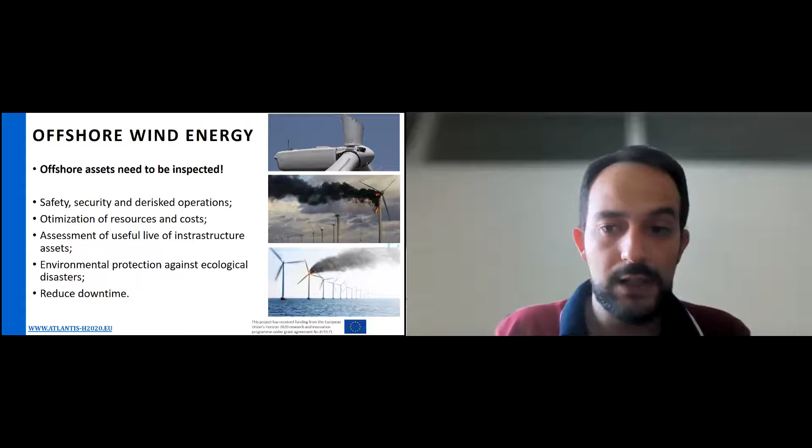So, hello, my name is Andry Maykol Pinto. I'm an assistant professor at the Faculty of Engineering of the University of Porto, and also a researcher from INESC. I'm here today to talk a little about Atlantis. In Atlantis, we are addressing the relevancy of inspection, maintenance, and repair activities for the offshore wind energy sector, since offshore wind farms require higher efforts related to turbine maintenance and logistics. And this is a rising problem since the offshore wind farms that are operating, particularly in Europe, are relatively young. Nearly 80% of the installed capacity will remain in the first half of their design lives by 2028.

So the project includes relevant stakeholders from the robotics sector, from the offshore wind energy market, as well as from the maritime industry. We have 10 partners, and Atlantis mainly addresses the scientific and technical challenges in this field, in particular a test facility and services for contributing to a seamless progression of robotic prototypes along the different TRL ranges, the development of new robotic platforms and autonomous driving features to improve the preservation of human life and safety, the enhancements related to operations and perception capabilities of maritime robots to make them more suitable to operate in critical conditions at offshore wind farms, which are needed to reduce the costs of maintenance and to avoid catastrophic failures, of course.

And finally, the acceleration of research and development of maritime robotics and the adoption of technology by end users. This project will establish a pioneer pilot infrastructure, which is particularly interesting for robotic developers whose goal is to demonstrate the added value of technology in offshore wind farms. Stakeholders from the offshore wind energy sector will directly benefit from these demonstrations, from these validations, and in particular because of the technology uptake.

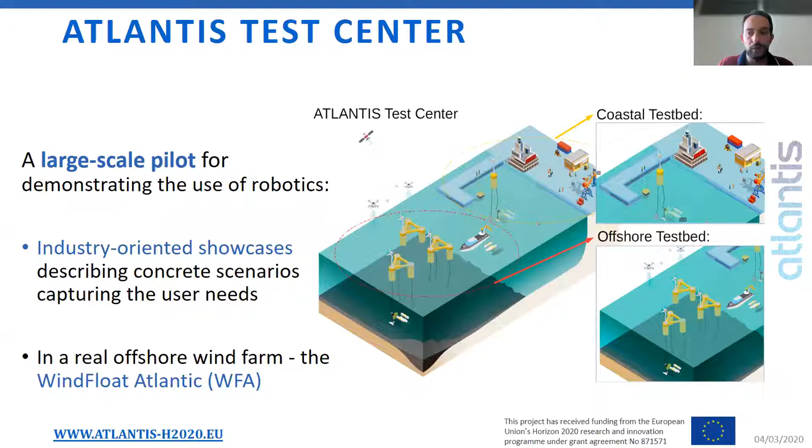Here in Atlantis we are developing a pilot infrastructure that is formed by two locations. One is the coastal test bed and the other is the offshore test bed. I will not show the video because of the time constraints. Nevertheless, the coastal test bed will be located in the Lima River here in Portugal. It will be linked to local stakeholders from the offshore sector, and the offshore test bed will be located in the WindFloat Atlantic Park, which is an offshore wind farm formed by 3 floating turbines in the Atlantic Ocean. This wind farm is owned by WindPlus, and it will be used to validate and demonstrate technology at high TRL levels. The Atlantis Test Center will constitute the first European test center capable of demonstrating robotic technology under extreme weather and sea state conditions, in particular because of the Atlantic Ocean.

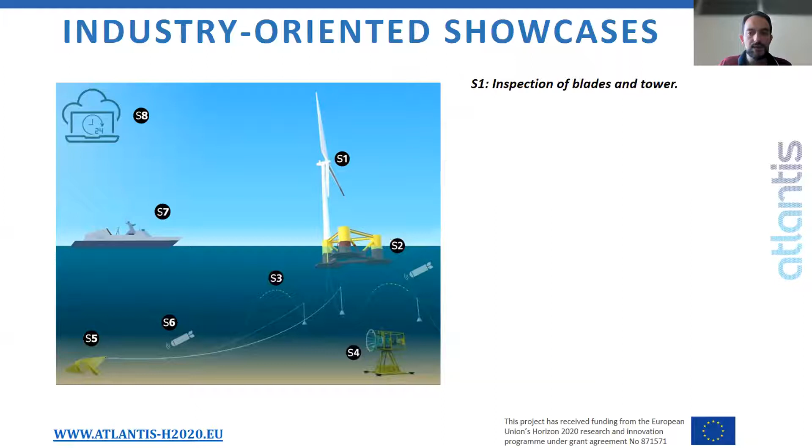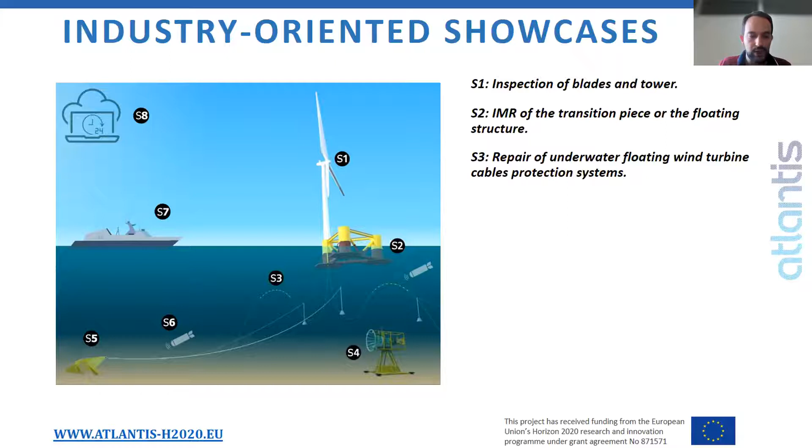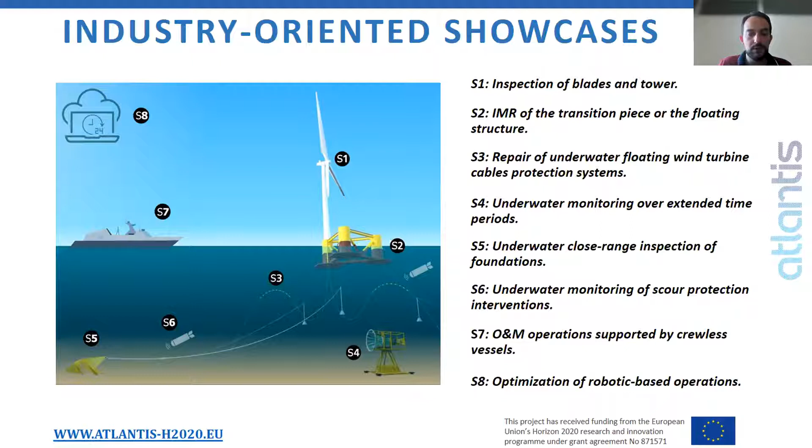It is characterized by showcases and scenarios for inspection, maintenance, and repair activities that are being led by the industry. For instance, inspection of blades and towers, inspection of transition pieces, repair of underwater floating protection systems, underwater monitoring over extended periods of time, underwater close range inspections, underwater monitoring of scour, operations supported by crewless vessels, and finally the optimization of robotic-based operations. Each scenario addresses specific technical aspects of inspection and maintenance, and it enables distinct robotic solutions and services to reach technological maturity. These robotic solutions can be of different nature. For instance, the Atlantis Test Center will have scenarios for the operation of AUVs, UAVs, ROVs, ASVs, and different inspection, maintenance, and repair technology. I will not enter into many details for each scenario because we are publishing videos describing the specificities of each scenario.

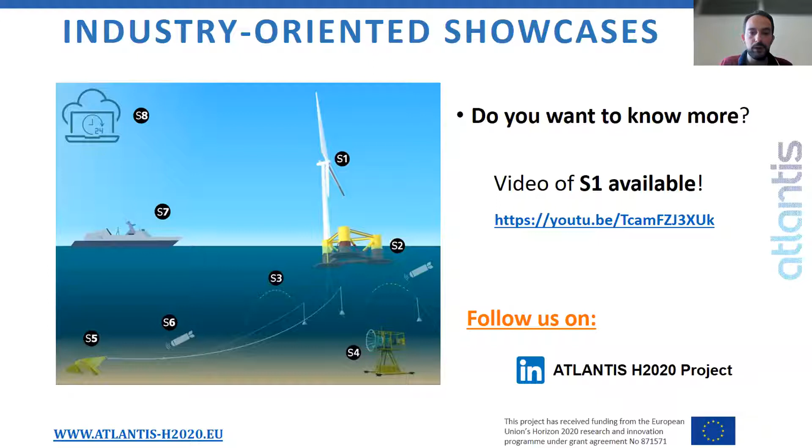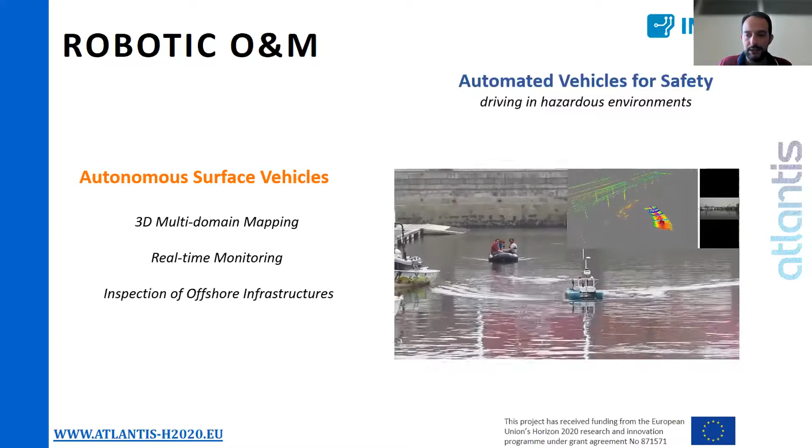More than providing a test facility, we also provide services to both academia and industry, and these services will support the activities at the Atlantis Test Center. This is particularly interesting for everyone that wants to perform open sea experiments in a safe and cost-efficient manner. But of course, the Atlantis project has amazing robots that will be demonstrated in different scenarios. We are increasing the TRL of robotic platforms to respond to industry-led challenges and problems. We are developing a new era for robotics-based O&M operations. I will just present a few examples of technology being enhanced in Atlantis. The first is the ASV technology for multi-domain mapping. A perception and navigation solution can be installed in different small to medium platforms, and it will be able to recognize elements in the environment, for instance, for monitoring the scour.

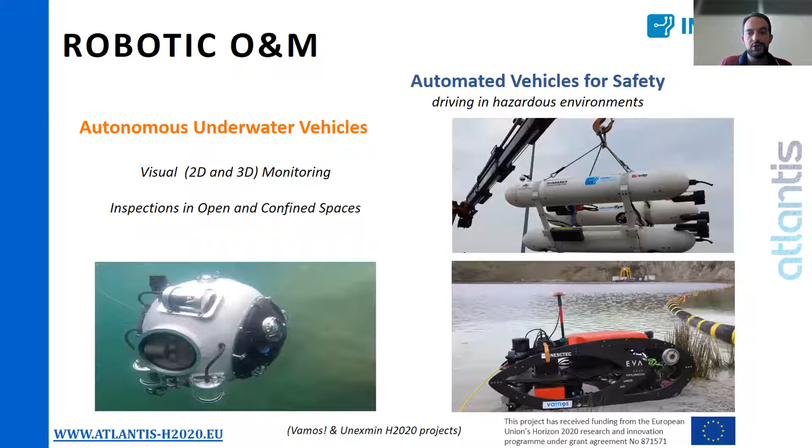We have a wide range of underwater vehicles. These vehicles can operate in different hazard scenarios for inspection, maintenance, and activities, from confined flooded mines, galleries, to flooded open pits, or even at dams. The performance of this technology will also be investigated in the Atlantis Test Center.

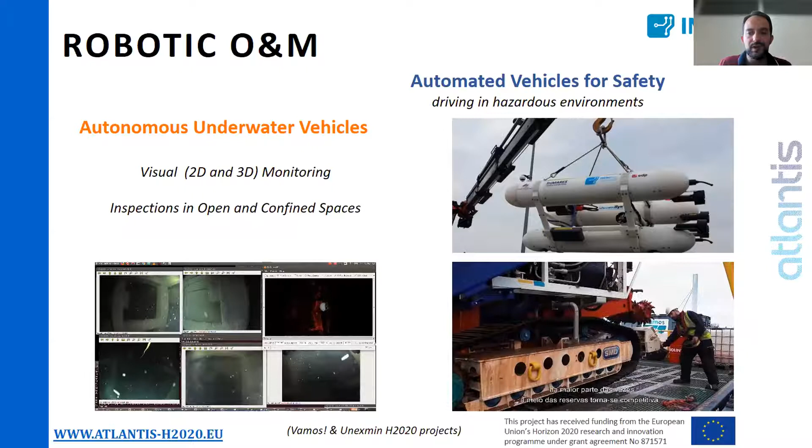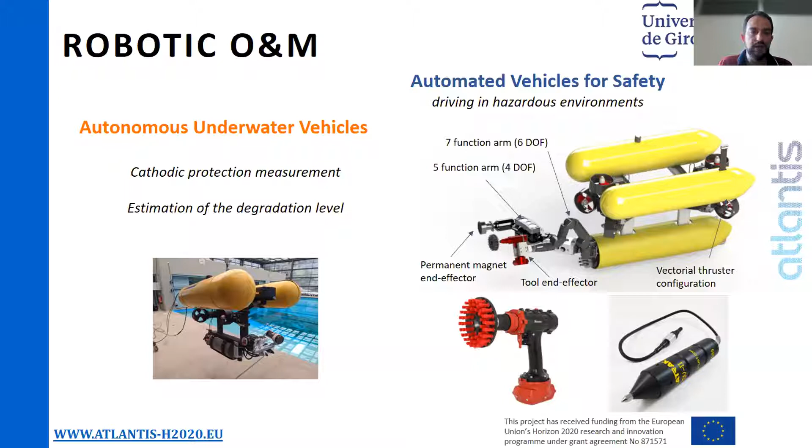We are using intervention AUVs for cathodic protection measurement for underwater structures. Autonomous measurement of cathodic protection potential over surfaces, beams, and other structural elements of the floating structure, including the necessary surface preparation, cleaning with the rotating brush, are being developed. The estimation of the degradation level of the protection anodes, automatic 3D laser scanning of protection anodes, and reconstruction of the anode volume for the estimation of the volume loss over time is also being developed.

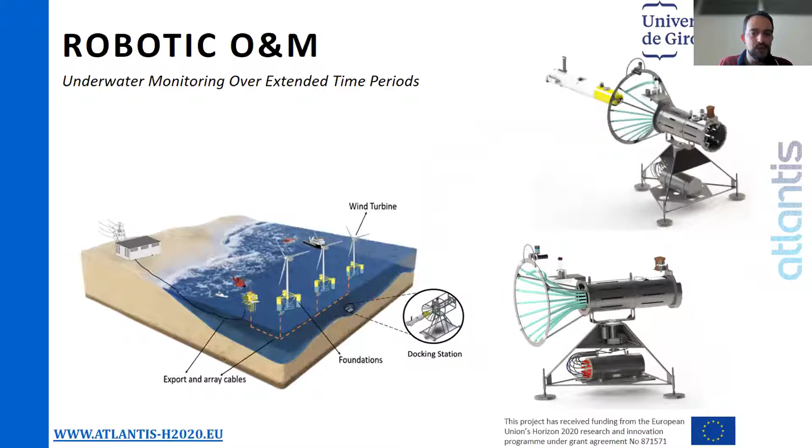We are also developing technology to enable long-term deployments of AUVs, for instance, a docking station with wireless charging and wireless communication. And regarding the AUVs, a set of advanced features foster the autonomy of these agents. Our goal, of course, is to reduce the need of human-based operations here.

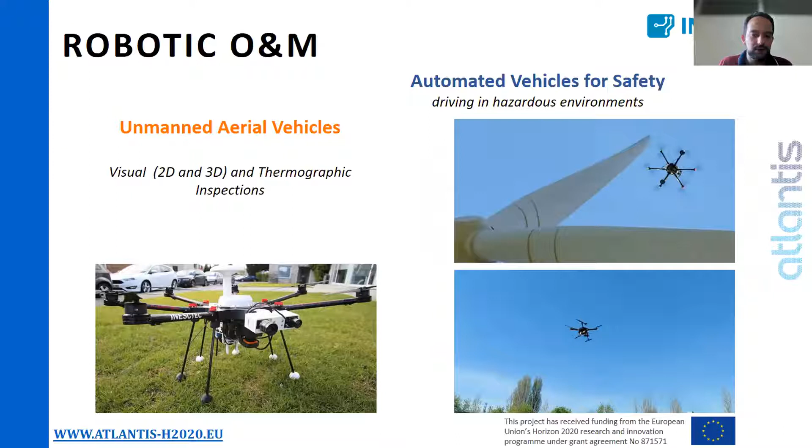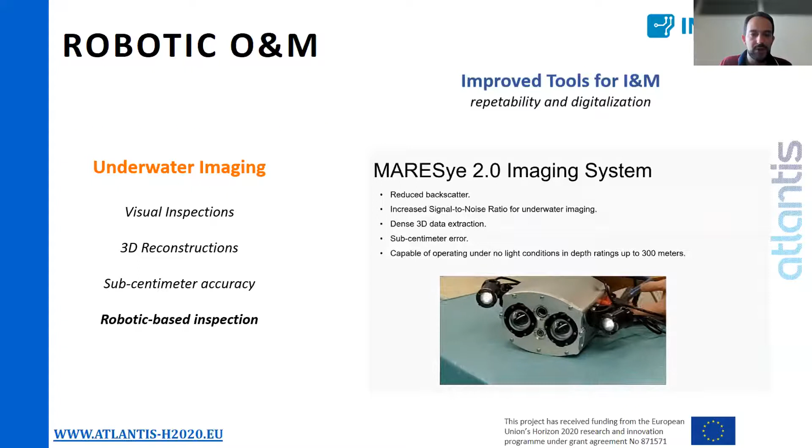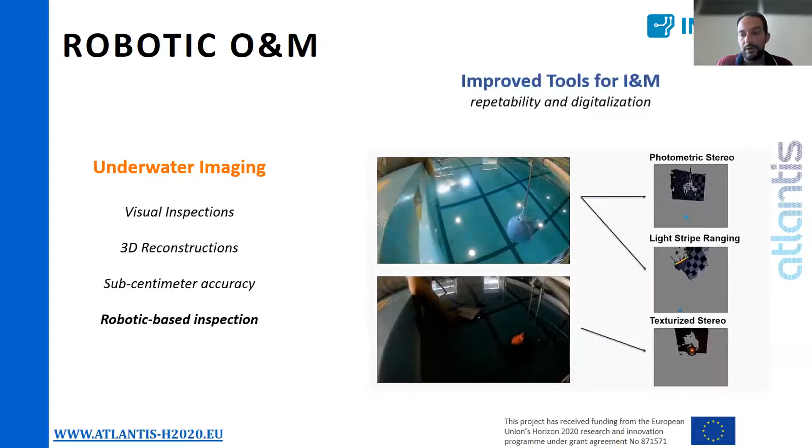We are also developing technology to support offshore operations, making the robots more capable of perceiving and interacting with the scenario. For instance, an underwater imaging system for close-range inspections is being developed under Atlantis. This system is able to provide 2D and point cloud information that is very accurate. The information is perceived in real time, and it is robust to photometric issues. We already discussed this in the previous presentation, related to subsea conditions. And this is crucial for tasks that involve intervention. We just saw that.

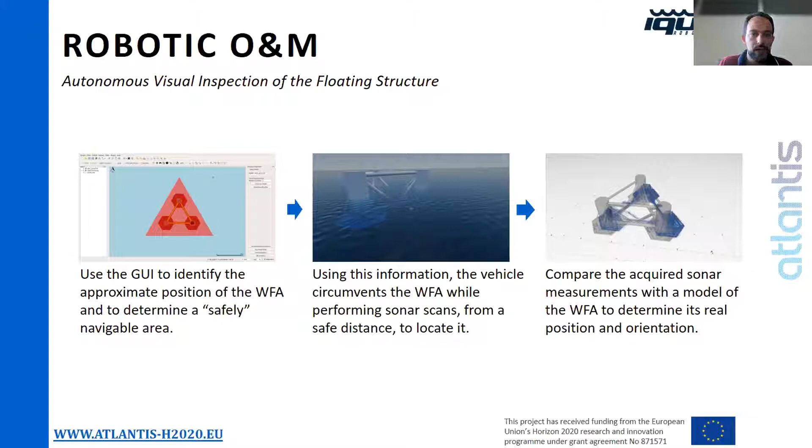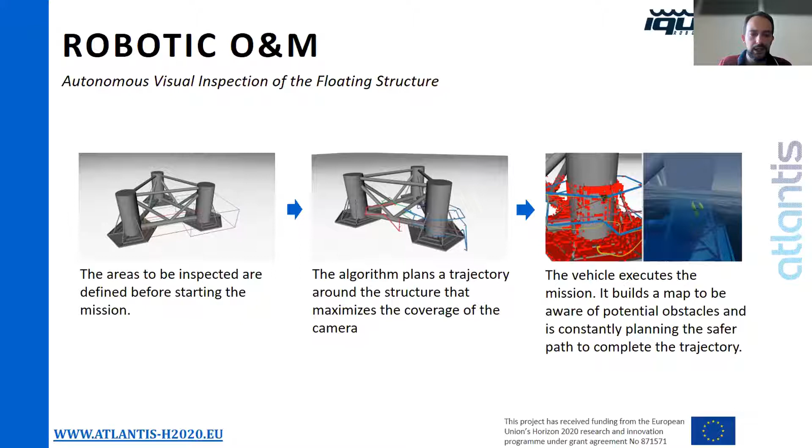Of course, we are developing other tools, for instance, for autonomous visual inspection of the floating structure. In particular, software for enabling close-range navigation. These navigation techniques intend to facilitate the visual inspection, mainly through autonomous underwater vehicles, which are simply not used by this industry.

Also, a tool for mission definition and supervision is under development. It will provide live and historical information. It will facilitate operations for planning and control, and of course, operation analysis. This is quite relevant. It will also include an interoperability function for managing different vehicles by a unified command and data sharing, and of course it will be already ready for ROS 2.

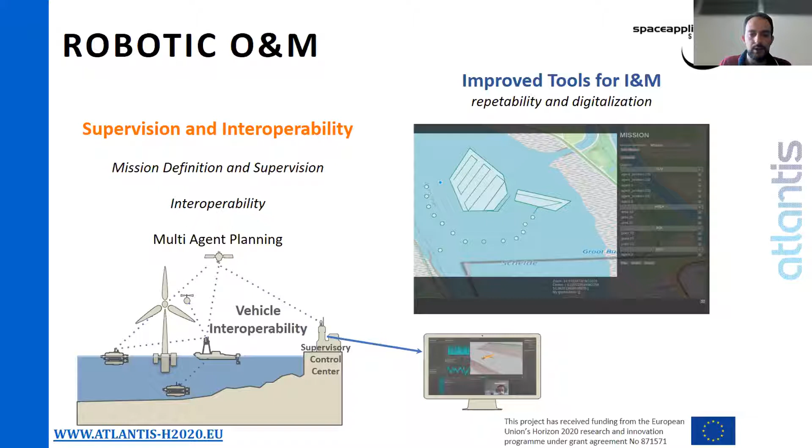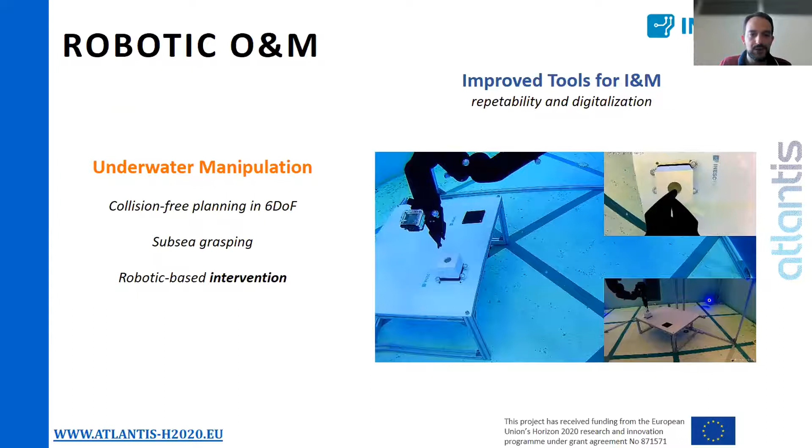New algorithms for safe and precise underwater manipulation are being investigated. Advances in this field will support the rise of new autonomous intervention techniques. So we have much more technologies.

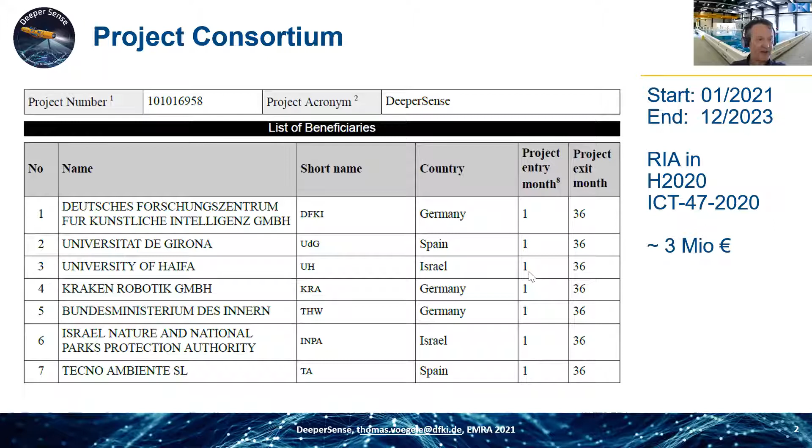And what we want to achieve in this project is that we really want to significantly improve the sensing capabilities of underwater, and not only underwater, robotics. And we want to do this in three use cases. The first use case is related to diver monitoring. So we want to enable systems that can look at divers and watch them doing their job and alert the oversight crew if there are any problems.

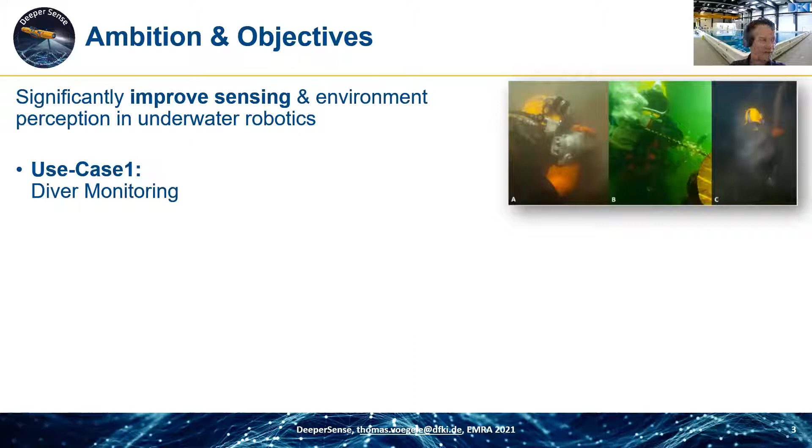The second one is on AUV navigation in coral reefs. So coral reef stands here for a complex and very delicate environment. So we want to enable AUVs to navigate much better in these coral reefs. And the third use case is on seabed mapping and seabed sediment classification.

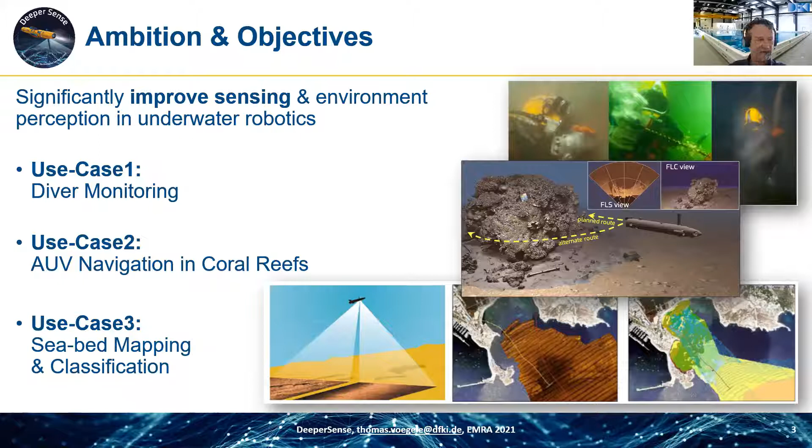The idea behind this whole thing, what we call intersensorical learning, was inspired by a relatively recent paper from Christensen et al. on bat vision. They showed that a combination of artificial ears, acoustic sensors, optical sensors, and neural networks can enable these acoustic sensors to create images that are like visual depth images. And this inspired us to come up with our concept for this DeeperSense project.

To explain this: in the training phase, we want to take a sensor, for example sensor B, which is a sonar system that creates some kind of fuzzy data, and combine this with, for example, a high definition camera through a neural network, and then train the acoustic sensor, train the sonar to create pictures that are almost the quality of the high definition camera.

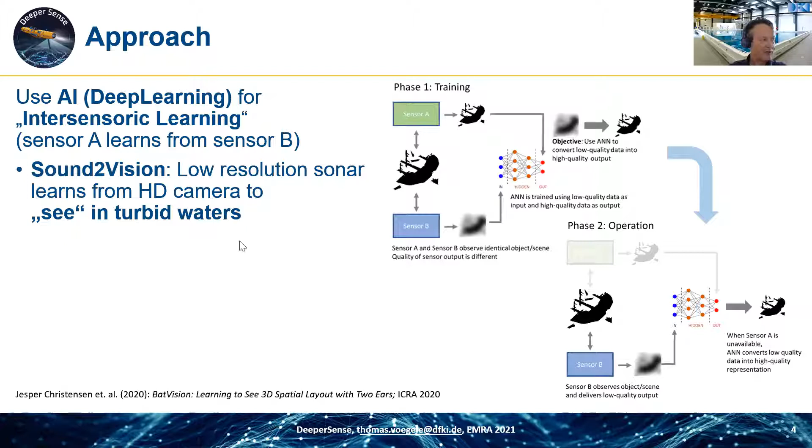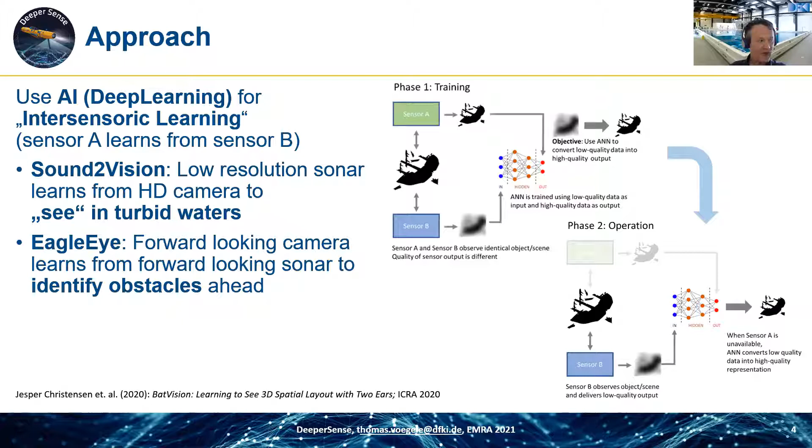And we want to do this in three different applications, really. Sound2Vision, which is related to diver monitoring, where we want to use sonar and high definition camera to see in turbid waters. Then what we dubbed EagleEye, which is related to moving in the coral reefs, where we want to use a forward-looking camera and a forward-looking sonar as a combination.

And the third one is what we call smart bottom scan, where we want to use a side scan sonar and camera images from the sea bottom to enable better sea bottom classification. As I said, this is the idea. We are at the moment at the stage of conceptualizing this and setting up the training data. Of course, for all deep learning algorithms, training data is the most important issue.

And so we are trying to get training data in three different locations, in our facilities in Germany, Israel, and Spain, but also in natural environments close to these facilities. And of course, we also try to create synthetic data, but we already found out it's not so easy to find simulations for these environments. So this is definitely a challenge, to create the data.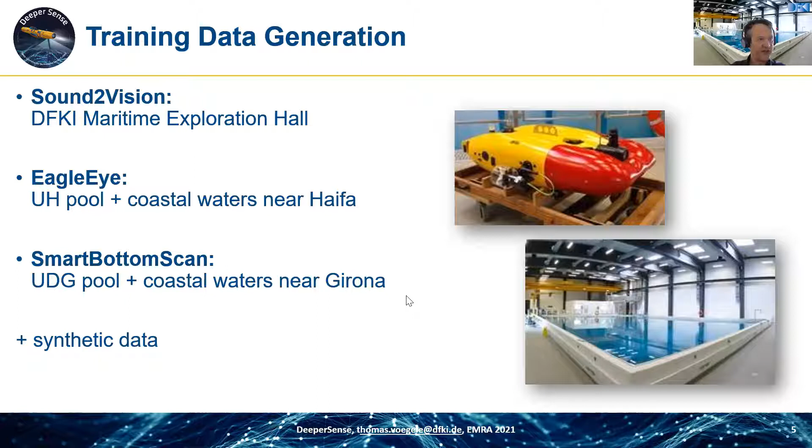That's why, when we have the data created, we want to share at least part of it with the community through a data repository. We are currently looking at options how to implement this, but some of these data at least will be shared with the community, and they will be used in our project for algorithm training in a three-step approach, three optimization and training cycles.

And then more importantly, once the artificial neural networks are trained, we want to validate them in field trials in 3 different natural environments. In Germany, we want to use the North Sea and also lakes around here in Bremen. In Israel, we're looking at the Mediterranean and the Red Sea, where we have a lot of coral reefs available. And in Spain, we're looking at the Mediterranean.

And the final demonstration will be in Germany, in Starnberger See, in 2.5 years' time, if everything goes well. The expected impact of this project, of course, is first to get these algorithms tested and field validated.

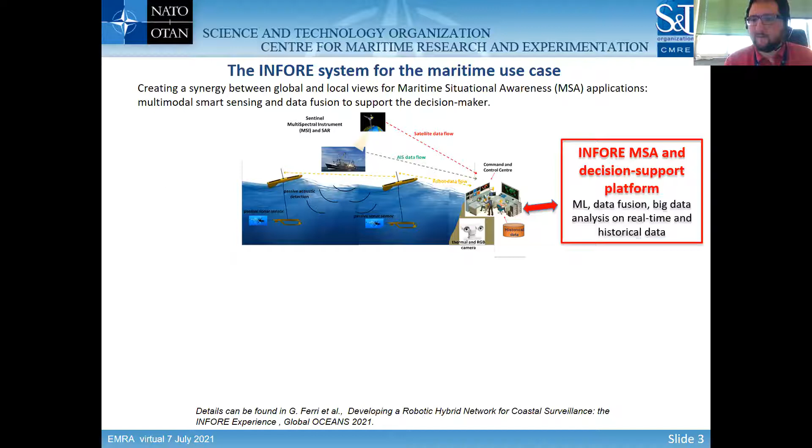And the idea is to use multimodal sensing and to fuse global view and local view based on a hybrid robotic network to integrate different sources of data to improve the MSA. So the global sensor, in which marine traffic from Greece is leading together with the Democritos Institute, will be a multispectral instrument from Sentinel satellite and a SAR sensor from the Sentinel satellite.

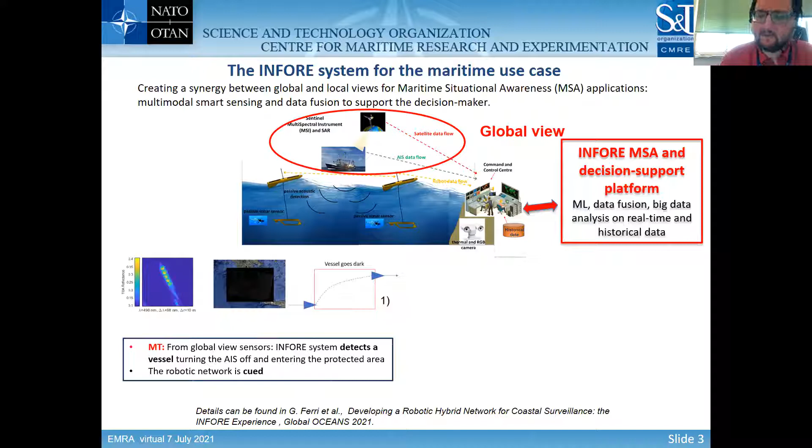While the local view, as I said, is composed of a hybrid and cooperative robotic network in which we have two wave gliders equipped with passive sonar sensors, a fixed thermal and RGB camera, and finally a fast vehicle for final target identification. So all this data is sent to the INFORE system, in which a fusion system based on machine learning and historical data, for instance on the track of vessels from historical AIS data, will be used for event detection that will trigger the actions of the network.

So our task inside the project is the development of this network of silent, long endurance, cooperative passive sensing robots based on wave gliders - surface vehicles. Why? Because they are early.

They can provide early stealthy vessel detection. They can offer persistent coverage of an area. They are silent, so we can use passive sonar processing. And they can share their data and cooperate with the onshore thermal camera. But these kinds of robots have limited speed and can provide bearing-only measurements because we are using passive sonar.

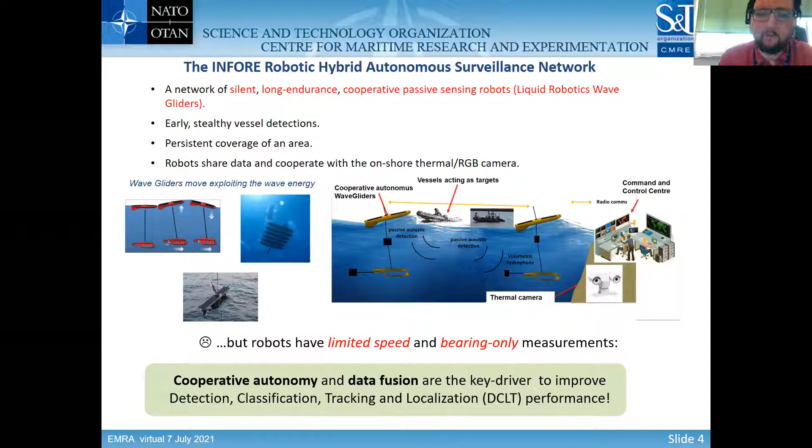So what we are developing is a cooperative autonomy and data fusion framework, because we think they are the key driver to improve the detection, classification, tracking, and localization performance. And how to do that?

So we are developing an occupancy grid mapping framework that will be the basis for cooperative behaviors. Based on experimental trials that we had with these Perseus volumetric arrays, we have developed a sensor model, and this sensor model is used to create this occupancy grid.

In each of these grids, the color represents the probability that a target is at a certain place. In this case, yellow, let's say, is good, and dark blue is bad. As you see, we have a beam of yellow because we have just bearing measurements.

Using these maps is useful because they can drive our area survey, giving us information about places that are likely empty (dark blue), likely full, let's say containing a vessel (yellow), and areas yet to be explored (light blue).

But it's not enough because we want to localize the target. So the vehicles share data, and here you can see the shared map, where we use the Laplacian operator and search for negative values of it. This means the two maps have some peaks of probability, which represent the geometric configuration we want to search for.

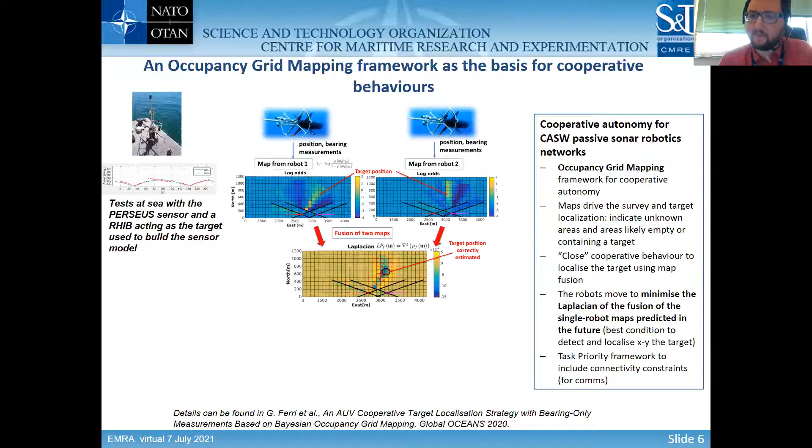How do we do that? We propagate into the future the possible maps according to different decisions of the robot, and the robots cooperatively decide their movement to create this good, from our perspective, geometric position.

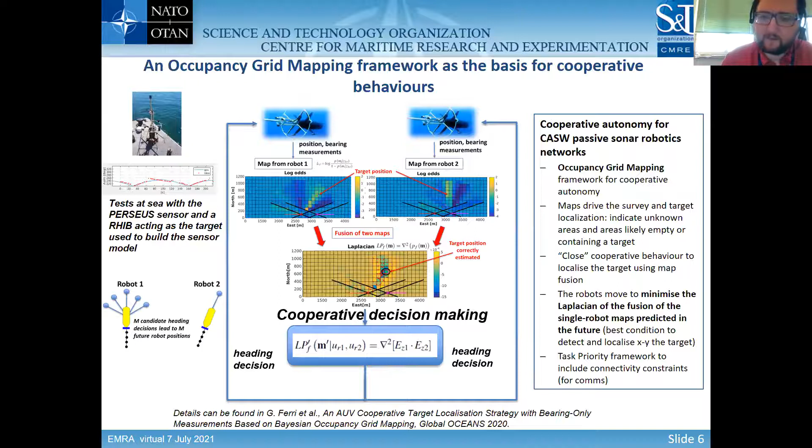And how do we bring that to the field, because it's always difficult to deploy this kind of stuff at sea? The first step is to make the wave glider fully autonomous, because as you probably know, when you buy the wave glider, it comes with a so-called front seat computer that is usually controlled via satellite Iridium messages.

The idea of the wave glider is that if you have some autonomy, it runs on board the command and control station or the support vessel, and not on board the vehicle itself. There is no integration between a possible backseat computer, installed for signal processing or communication management, and the front seat.

What we have done is install the backseat computer on the robot and integrate it with the front seat. This is important because in this way we can bring the autonomy directly on board the wave gliders.

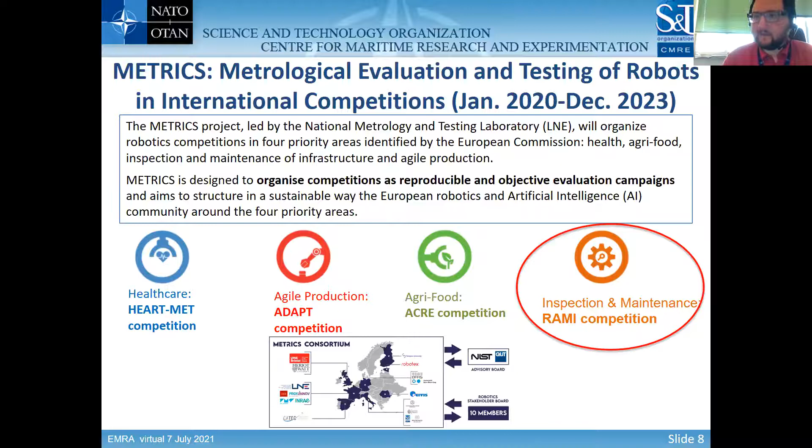As CMRE, we are in charge of the RAMI competitions, specifically the marine segment, because there is also an aerial segment organized by CATEC in Spain. For the marine robots, we follow our tradition of organizing a marine robotics competition.

The RAMI competition will be held in the CMRE water basin in La Spezia. The area is 50 meters by 50 meters, a protected seawater area with a depth of 4 meters. The important thing is that it offers unique conditions in the world for this kind of underwater robotics competition, so teams have to face realistic conditions in terms of salinity, tidal waves, and changing illumination.

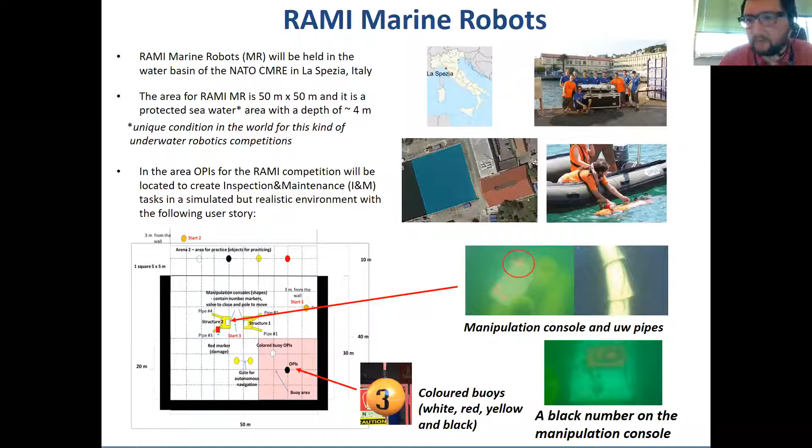In the area, we have created different objects of potential interest related to the inspection and maintenance task - you see manipulation consoles, pipes, colored buoys, numbers, and so on.

Which are the tasks and functionalities we are going to present? We are presenting three task benchmarks and three functionality benchmarks related to them. These tasks are essentially an intervention in an area where something happened, plus an area survey of different tasks.

You can see here the most complex task: the robot arrives, inspects the colored buoys, then inspects the manipulation area, and then closes some valves. The robot has to be fully autonomous during the whole mission, but during the manipulation it can be tele-operated.

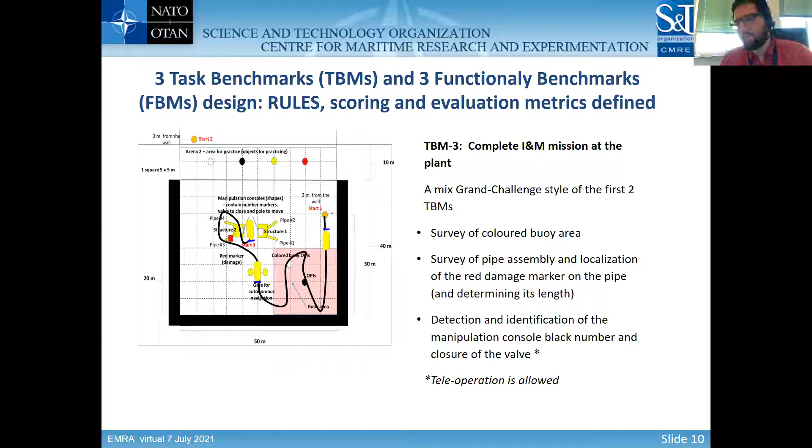Which are the next events and next dates? We are also working on preparing a virtual competition, both to prepare teams for the perception task and because, in our experience, when teams arrive at the real physical events they are overwhelmed by practical problems like motors that don't work. So we want them focused on perception, algorithms, and so on.

We also want to attract people outside of the marine competition, people from AI, since there's currently a boost in AI. Third, obviously, because of this sad international situation in which physical events are not allowed.

So what we have done is create a dataset from images collected at sea. We have divided them into 5 different classes: colored buoys, numbers on pipes, numbers on the console, red damage markers on pipe, and the rest. We will label that and propose this training set to the teams.

And the teams, when they have set up their software, the software will be evaluated on a validation set. This is important because these are the same OPIs that they will find in the physical event that we will have, hopefully, in summer 2022.

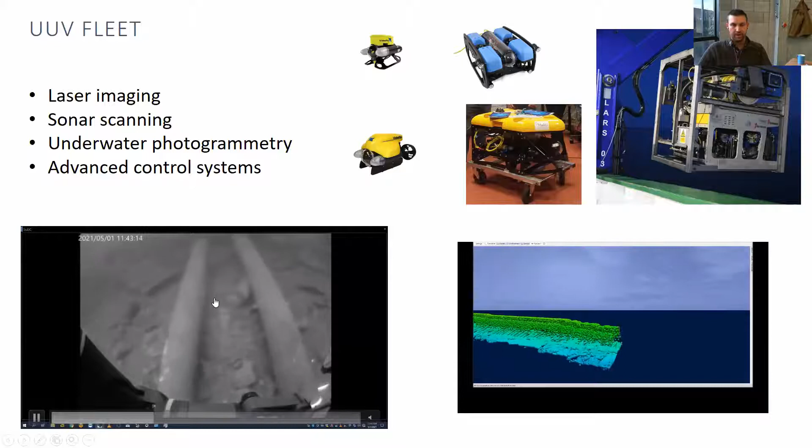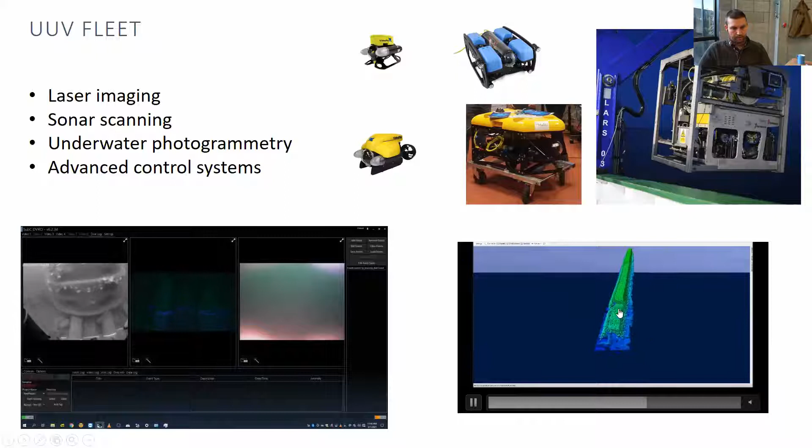Here we can see video from our latest ship time. We did some laser scanning off the coast of Ireland on a battleship from World War One, one of the biggest ones, Audacious. We were actually doing a live stream on YouTube, with a historian and a diver in place talking over our laser scan. Here we can see one laser line that we did, doing long laser lines along the shipwreck, 180 to 200 meters long. We still haven't processed the data, so hopefully we'll have a nice 3D model.

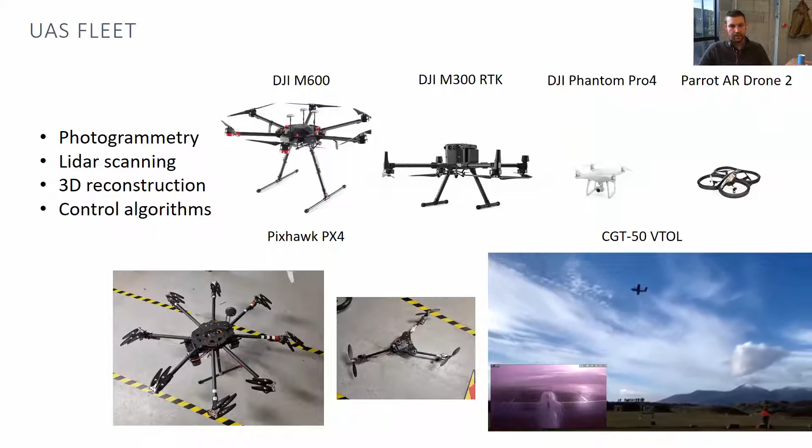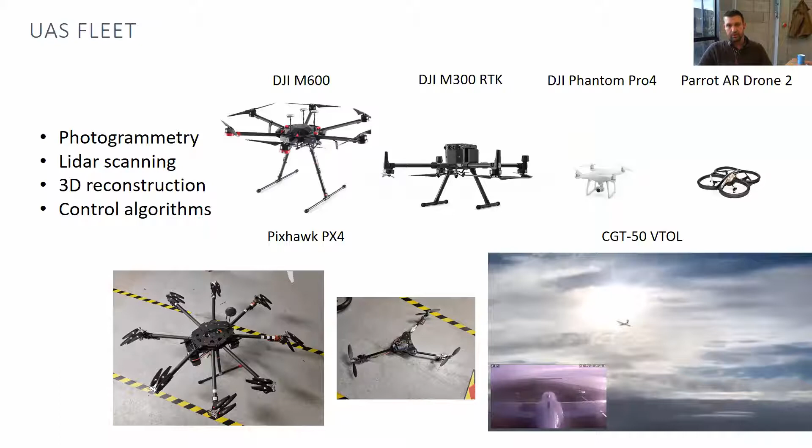Let's continue to the drones now. We also have various drones, from parrot drones, great for initial indoor testing, to real workhorses like the DJI M300 and M600. We developed some of our own drones, and our biggest one is the CGT-50, a vertical takeoff and landing drone which then proceeds into standard flight. It has a petrol engine and autonomy over 500 to 600 kilometers. We use those drones for photogrammetry, LiDAR scanning, 3D reconstruction, and also developing various control algorithms.

So how do we contribute to RAPID? What's the RAPID project? RAPID started approximately at the end of last year, so we're early in the project. The goal is detection of critical deterioration in transport system infrastructure while trying to minimize system disruption and delays. Traditionally, the structural condition monitoring of bridges, ships, and other port infrastructure relies on non-destructive visual examination by engineers actually on site.

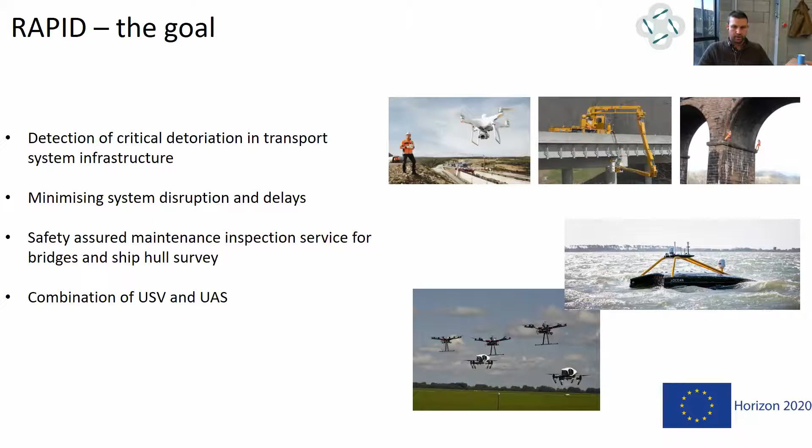We know that approximately 9% of all camera inspection data is done by drones, however they're all manually piloted, and the fault identification process still requires mobilization of scaffolding and elevated machines to support that inspection. Engineers must physically be there and do actual research, detecting for example cracks in bridges and marking them. So the whole goal of the project is to automate the workflow—from getting the drone to the site using autonomous surface vehicles, to performing inspection and fault detection using machine learning techniques, all the way to reporting.

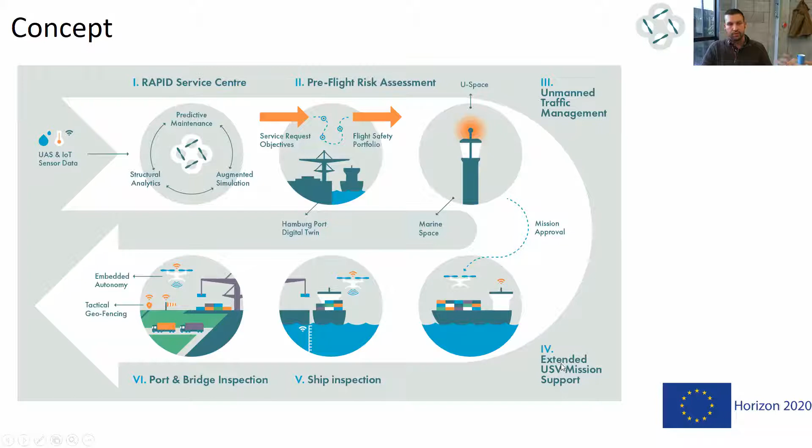So here we can see the general concept of the project. So we would have a RAPID service center, which then issues service requests, like for predictive maintenance of the bridge or some ship. It goes through digital twin. So the whole path of the drones should be calculated and simulated. After it passes that, the whole flight path goes to U-space. After the mission is approved, then we can proceed to the actual mission, which can be extended using the surface vehicle.

There are 9 partners in the project. The project coordinator is University of the West of Scotland, and each of the partners has a dedicated role in the project. So University of the West of Scotland is managing digital twin and risk management. We, as University of Limerick, are working on swarm robotics, sense and avoid systems, and autonomous flight. SINTEF is there for smart energy management. Thales does machine learning for crack detection.

University of Dundee is dealing with the laws and standards which are related to drones flying, because flying drones are much more dangerous for the public, and the public does not perceive them like underwater drones. So there is a lot of work to be done there. Revolve and Fraunhofer are working on integrating and validating the assets for inspection and service. And Hamburg Port Company actually provides the whole facilities for actual testing, and they're going to use the RAPID project outcomes. And XOCEAN provides the surface vehicle.

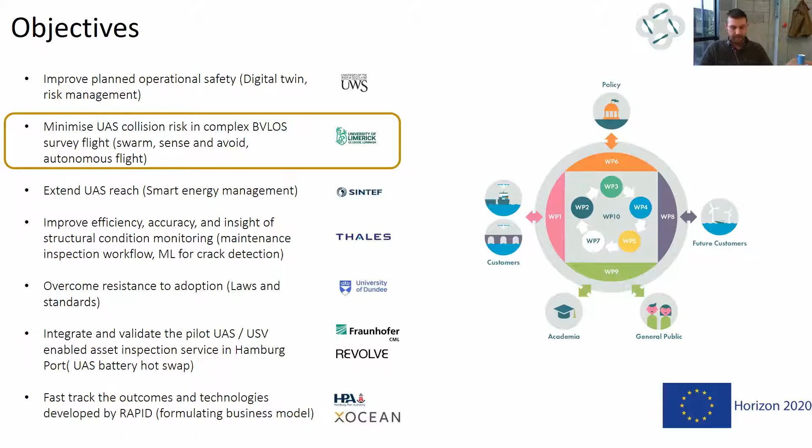So what's the role of University of Limerick? We are there to develop beyond visual line of sight flight control and mitigation of the risk, develop detect and avoid techniques, develop relative-based navigation in GPS-denied environments, and then one of the most important tasks, autonomous landing on the surface vehicle. Our platform for the project is the drone DJI Matrice M300 RTK.

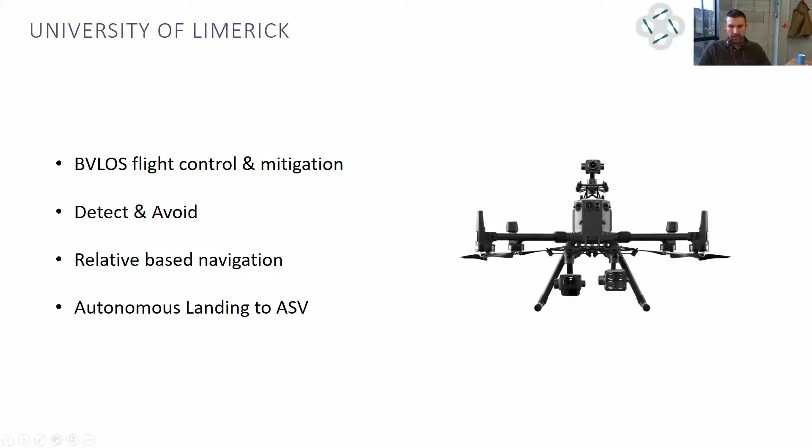So the whole thing is developing a sense and avoid system, in long range, mid range, and short range. For short range, we would use stereo cameras on the drone itself. On the M300 drone, there are 6 stereo pairs. For medium distance, we would use the infrared camera or zoom camera on the drone with the laser range finder. And for long distance, standard ADS-B would be used.

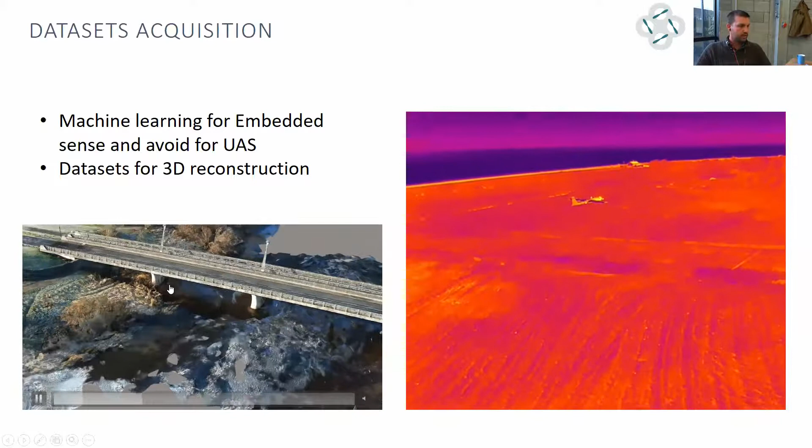Here we can see the initial bridge reconstruction we did with the drone. This is a bridge at University of Limerick. It's approximately 140 meters long. This was not real time, it was post-processed, obviously, and it is still not the highest detail we can achieve, but it's nice to see what the drone can do and what we are able to create. We can see here something that can also be interpreted as cracks. So it was a test of the resolution and the details we can achieve with the drone.

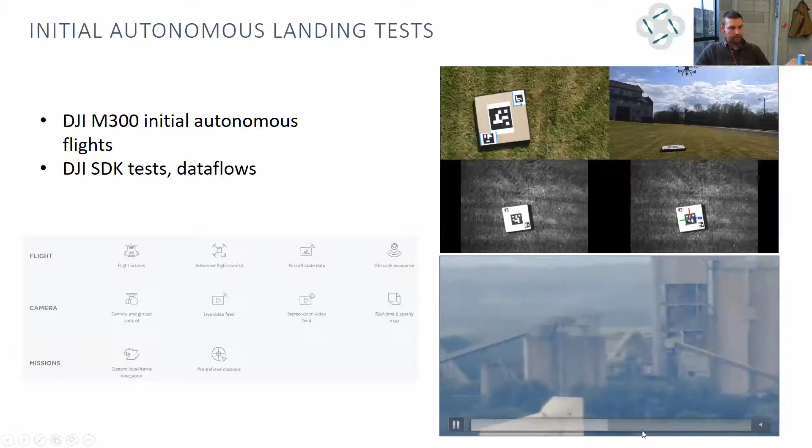Later on here, we zoomed in on a church tower. The church is approximately 3.5 to 4 kilometers away, so about half the distance of the cement factory. So we can see what the system is capable of. Now we need to proceed with developing autonomous flight and other algorithms, but at this stage of the project, we are sure of the capabilities of our platform.